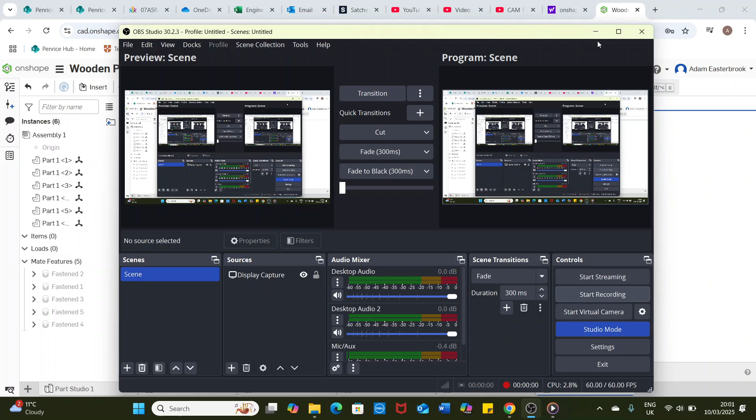Right folks, I thought I'd do a quick video showing you how to create an exploded drawing of your product in Onshape. Let's get started. So here's my product in Onshape. I've made my parts. I've then inserted them in my assembly tab. I've mated all the parts together, and that's another reason why we've got to get into the habit of creating multiple parts, multiple components for our designs.

Okay, so I'm in my assembly tab. I've clicked ahead, so it looks like this. This is the standard view. Over to the right side of the screen here, I've got an icon that says exploded view. So I'm going to click on that, and I'm going to click on add exploded view. To give myself a bit of room, I'm going to hide these assembly instructions on the left here. Just gives me a bit more room to play with. Here we go then. Start to make my exploded drawing.

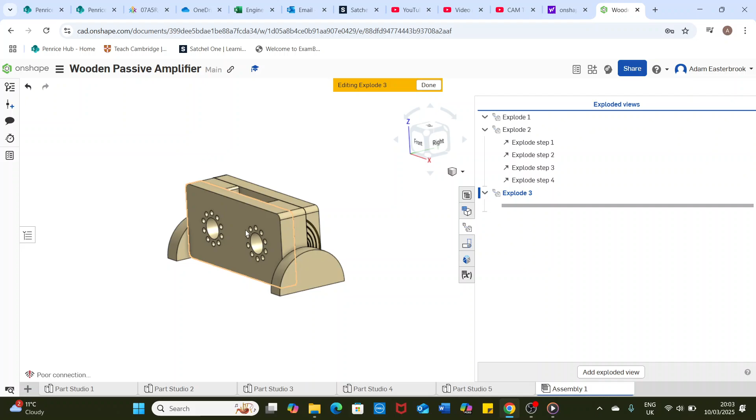So with an exploded drawing, what I want you to think about is imagine if there was an explosion bang in the center of the product; things would start to move outwards from the center. So we've got to think about those axes, the y-axis, the x-axis and the z-axis. So here we go then. I'm going to choose the front piece of my passive amplifier, and there's my three choices. I've got up and down, left and right, and backwards and forwards. Because it's the front piece, I'm going to come along that backwards and forwards axis. And there we go.

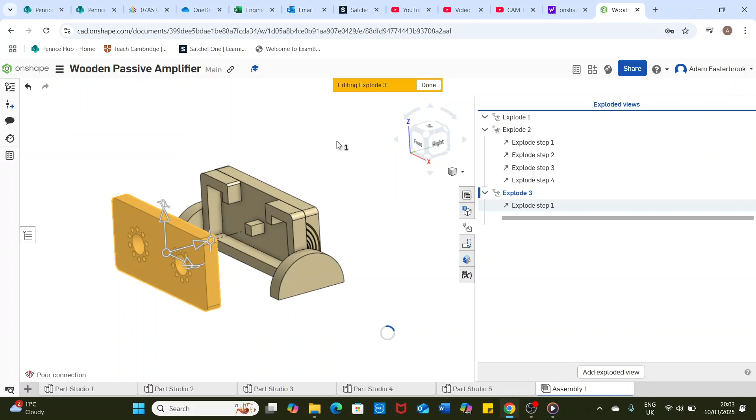Alright, there's my front piece. I've exploded it out. You can start to see a little bit of a dashed line, and that shows the person looking at my drawing where that piece originally sat. I'm happy with that. Green tick it. Next, I'm going to go to the back piece of my passive amplifier. Left click on the mouse to choose that part, and again I'm going to explode it out along that back to front axis. So click and drag it out. I'm happy with that. Green tick that.

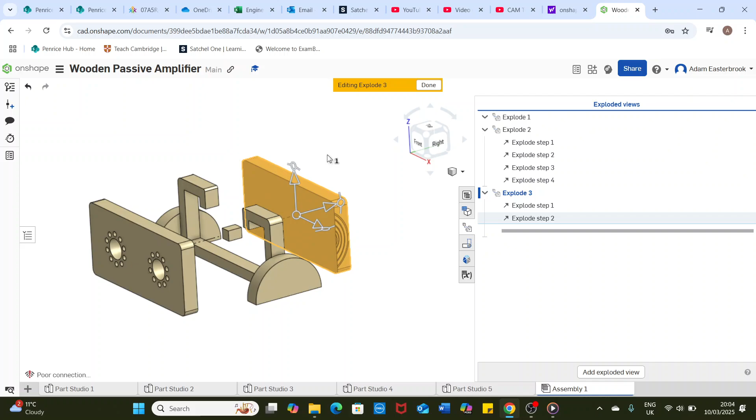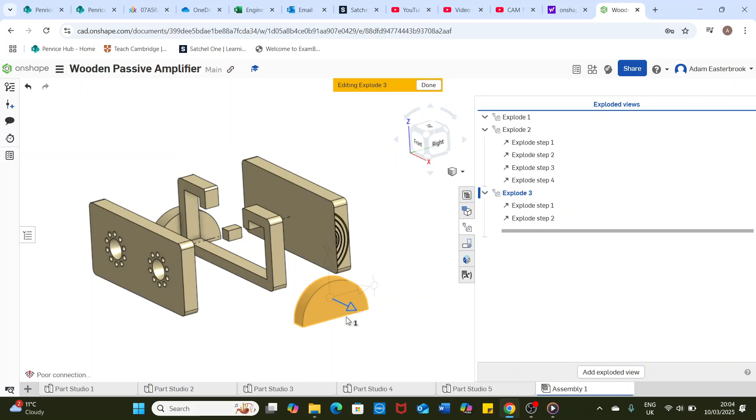I'm going to do the side pieces now. So I've clicked on the side piece. This time I'm not going to use the front and back axis because that just wouldn't look right. It's got to be exploding from the center. So because it's a side piece, I want it to be going left and right, and I'm going to come away and I'm going to green tick that and just click off that piece. I'm going to finally click on the final piece. Again, I'm going on that left to right axis. I'm moving it out, and I'm happy with that. I'm going to green tick it.

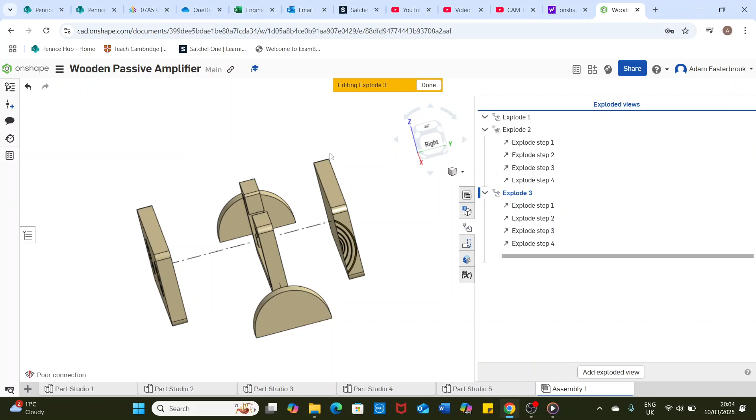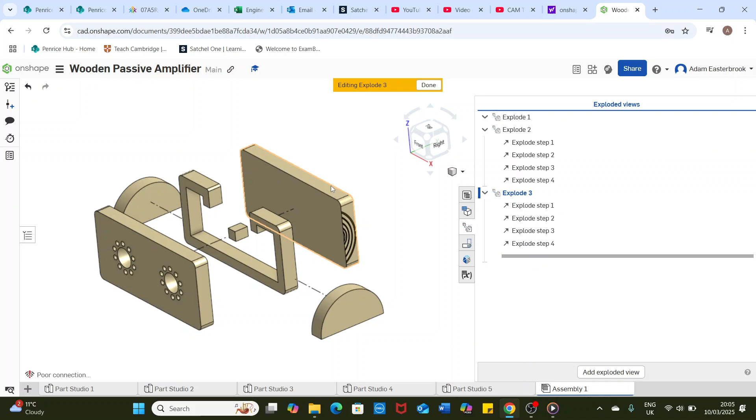There we are. There's my exploded view of my design. So I could take that to someone and say, right, I want you to make a prototype of this design, and I could give them the exploded view, and they've got a good idea of how the different parts would need to come together and be glued up. Alright, once we've done that, we can close our exploded view down by clicking on that button there, and then we can see our exploded view in a bit more detail in this screen. I can open this one up, and it's brilliant.

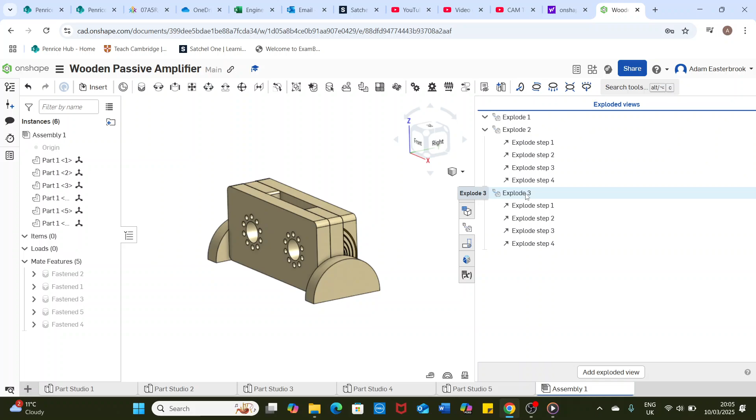Once you're happy you know how to do it, you can go back to the assembly tab, the normal view. If you just click done, it puts it back together again. You haven't lost what you've just done. You can go back and get it, click on exploded views. You can see I've done three. So I'm going to double click on my third one. Again, I can close that off and close that off, and you can see a detailed exploded view of my final design. Give it a go.